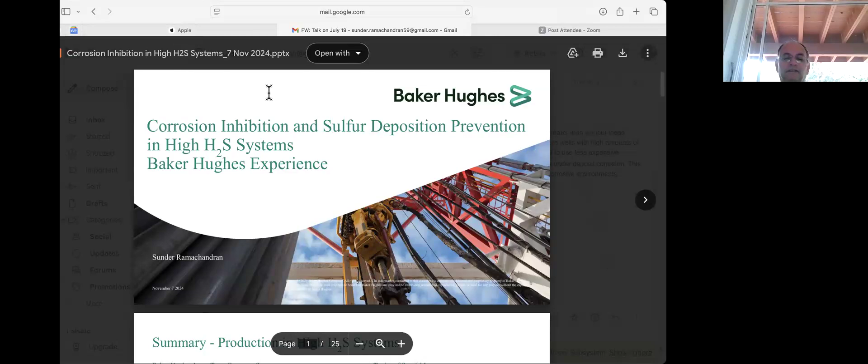Ooh, what happened? Did I do something? You're messing around, Sunder. What have I done? Do you see this? Now we're sharing your emails with us, your email now. Oh hell, what did I do? I was trying to advance the slide. Okay, go back to share. Oh wow, sorry, this is ridiculous. Not a problem, share. Okay, share. Desktop one, okay, let's see if it goes in here. Okay, now it's good, now it's good, now will it? Okay, yeah, I can move now. So I couldn't have moved, I wasn't able to move.

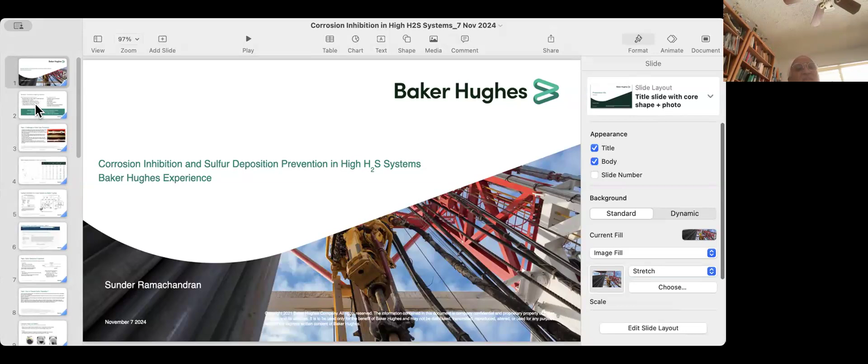So I'm going to talk about corrosion inhibition and sulfur deposition prevention in high H2S systems. This is pretty important because people have been producing in high H2S systems since the early 90s or even the late 80s. My company has had a lot of success working in this area, and we've been involved in some of the earliest and highest temperature wells. In Mississippi, there's a certain formation that got down to about 400 Fahrenheit, and we've been treating there, we were among the initial people working there, though our competitors are perhaps there now, but Shell started producing in these facilities which are extremely high temperature and high in H2S.

These fields are important because there is naturally hydrogen sulfide present in a large number of oil and gas wells. As you go lower down, when you reach 150 Fahrenheit in a limestone formation, you get huge amounts of H2S. For example, in Qatar or in the Ghawar field, there's the Khuff formation. If you drill down lower, once you pass 150 Fahrenheit in limestone, due to thermochemical sulfate reduction, the sulfate gets reduced by organic material to H2S, and you get large amounts of hydrogen sulfide.

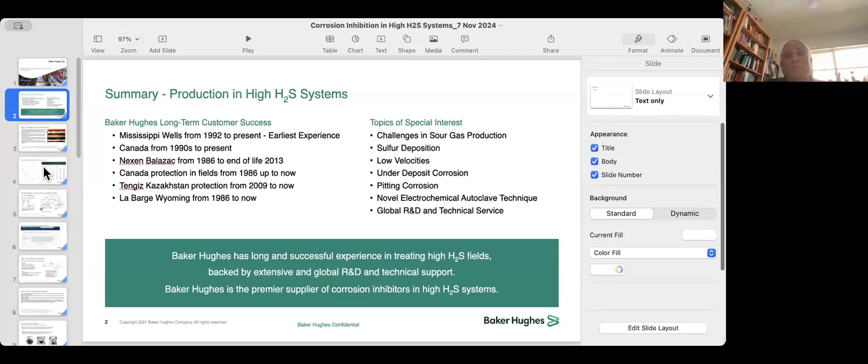We do, for example, Qatar condensate, which can be extremely corrosive. A lot of your major facilities which have high amounts of H2S, we protect them. Production and capital costs can be substantially much higher, and you can have sulfur deposition problems. You need to control that deposition.

Sour gas will increase because we have basically drilled most of the low reservoirs. The deeper you go, the higher the H2S. In fact, if you go to particular fields, you'll see this as you go down.

We have used these to enable people to use less expensive materials. Carbon steel has been in use from the 80s and 90s. Sometimes there's not great awareness of this, and this is the reason it's there.

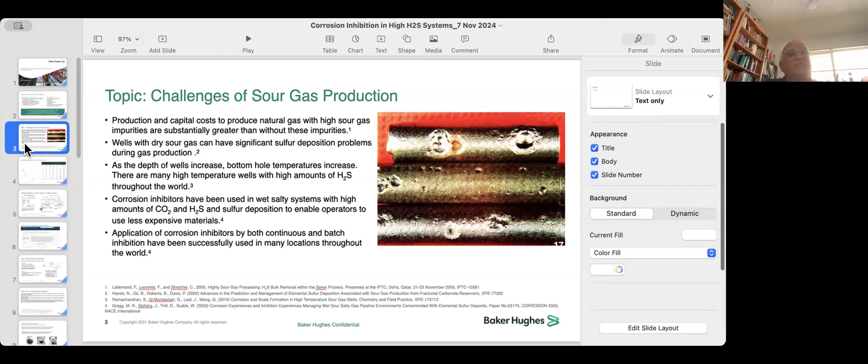These show our experience where we have worked in a 90% H2S field. This is Exxon LaBarge, 65% CO2. We have a range of applications, and you can see different chloride levels, different liquid production.

When you do corrosion and you look at corrosion, oxygen corrosion is most probably the most aggressive. CO2, H2S gives you pitting corrosion, and you do need higher concentrations of the inhibitor to work. This shows the different places where this works.

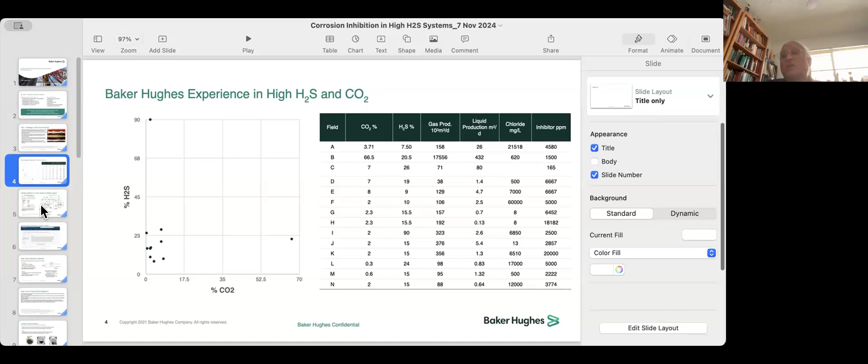High H2S is there in many, many fields. In the Indian context, perhaps Cairn Energy is also seeing some sort of H2S, but not as much as many of these fields.

This is the application in Thomasville, which is in Mississippi. What was done here was basically you put an inhibitor in. It was very important to determine the right phase and have an oil which doesn't flash out at 400 degrees and would carry the inhibitor through.

You can see the wells are 29 to 45%. You can see also in this system, this is the kind of system you need, and these have been very successful.

They're expensive, but putting in an oil carryover system was the way in the 1980s and 1990s that people chose to protect them. This is a Shell facility, and this is Exxon - the Mobile Bay production. Very few problems, but it was very important to have this phase stability and the choice of carrier oils to be done very well. If you don't do that, you have problems.

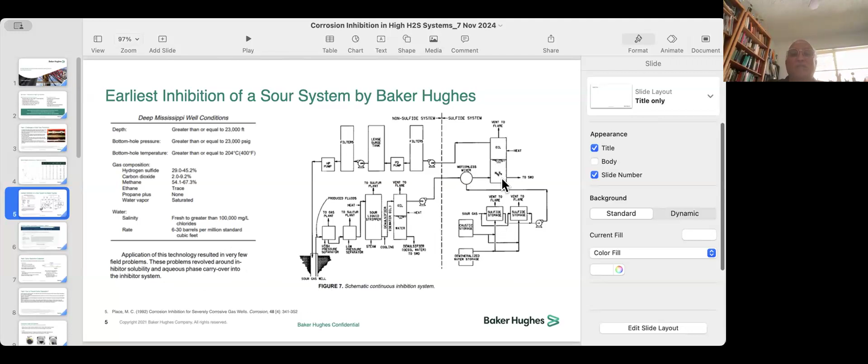This is the example for us at Bearberry in Canada, where we have protected a 90% H2S field. The problem right now - in the old days, there was a time when you really wanted to have sulfur.

The sulfur would be used in fertilizers. Nowadays, although you recover sulfur, fertilizer production prices are not great. Sulfur sells at about $40 a ton or something like that, which is very, very cheap. And so that's a problem - you don't want to really get into this.

One future area could be that there's lots of H2S in the ground. The dissociation energy of H2S is one-third that of water. One could think of a hydrogen economy relying on H2S and decomposing it to sulfur and hydrogen. That's possible, but right now no one is doing it. There's no technology, but that's an area of technological interest.

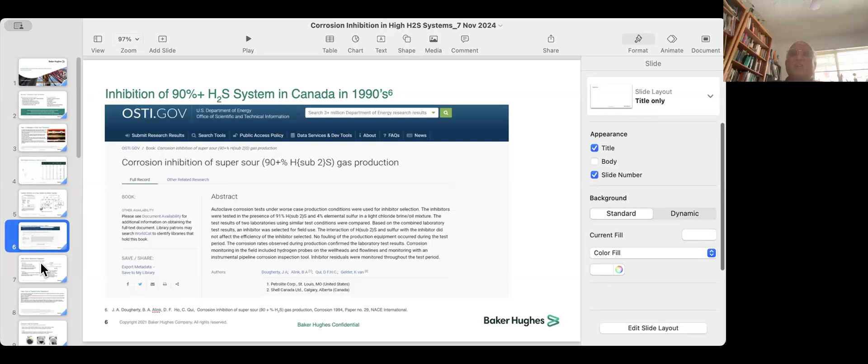Sulfur deposition is a significant cause of corrosion. Basically, the sulfur saturation point gets exceeded. When you bring up a high pressure, high temperature well, sulfur is soluble in the gas and oil, and often the gas behaves as a supercritical fluid, so you get a lot of sulfur there. As soon as the gas pressure lowers, solubility drops and you get deposition, and this is where you can get extremely severe corrosion.

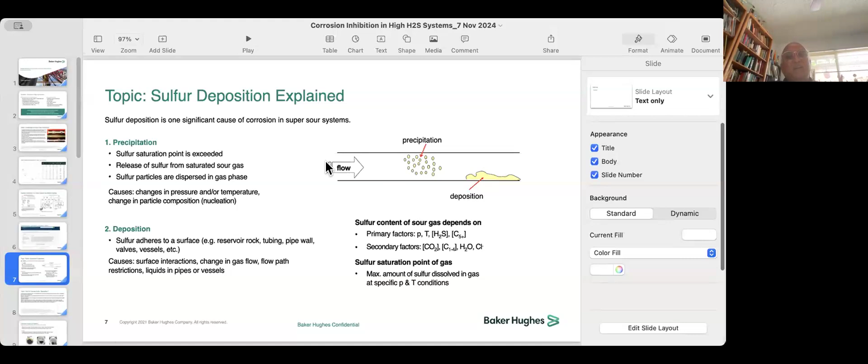This needs to be avoided at all costs, and one needs appropriate sulfur solvents and sulfur dispersants. There are sulfur solvents which have become fairly problematic because they're carcinogenic and have other issues, so people use certain dispersants instead.

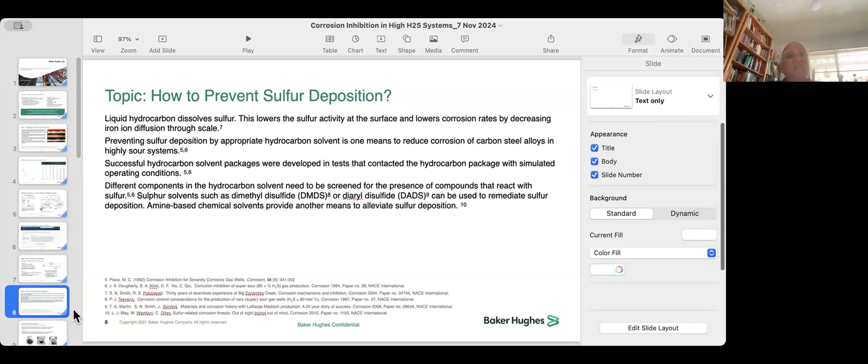So how do you prevent sulfur deposition? Sometimes hydrocarbon itself dissolves sulfur, so if you have lots of hydrocarbon you may not have this problem. You can sometimes inject an appropriate hydrocarbon solvent, and there have been many hydrocarbon solvent packages that do this. Dimethyl disulfide and diaryl disulfide have been used to remediate this, but these are extremely corrosive substances, and we also have amine-based solvents and dispersants which alleviate this sort of deposition.

This is actually the Nexen-Balzac system. It was lines near 1 million houses. These lines had 32% H2S... it was high. We protected that system until it closed. It closed when Nexen was bought by CNOOC, I think partly for the reason of how to deal with the H2S in these systems.

We used a kind of asphaltene sulfur dispersant to address this. A lot of it is correct chemistry, but it's also about the people involved—you need people monitoring the system and continuously looking at it.

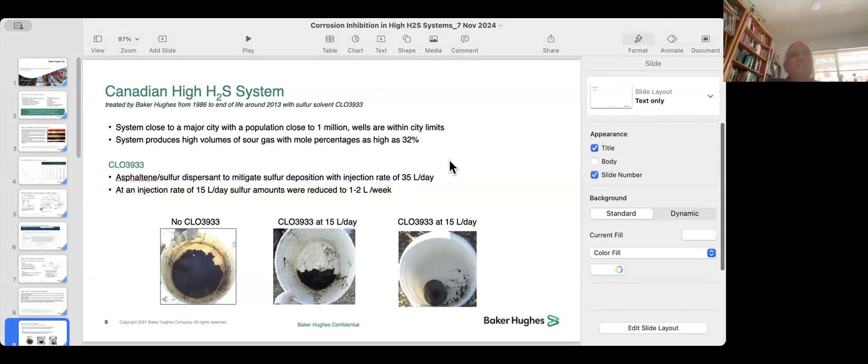Again, we have these sulfur deposition problems in Canada, Tengiz, Abu Dhabi—all of these places. Using the correct solvent at the right point, and looking at the solubility and phase behavior, you can sometimes find a solution. Ideally doing something thermodynamically correct is expensive, so you instead keep something in dispersion, which is the cheaper solution, and that's what industry generally does, as long as it's done consistently and properly.

So we have a whole bunch of solvents. We're big players in the Canadian market, and we use these all the time.

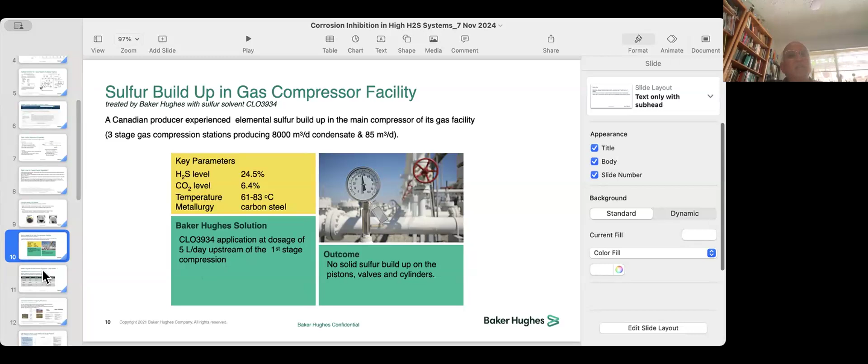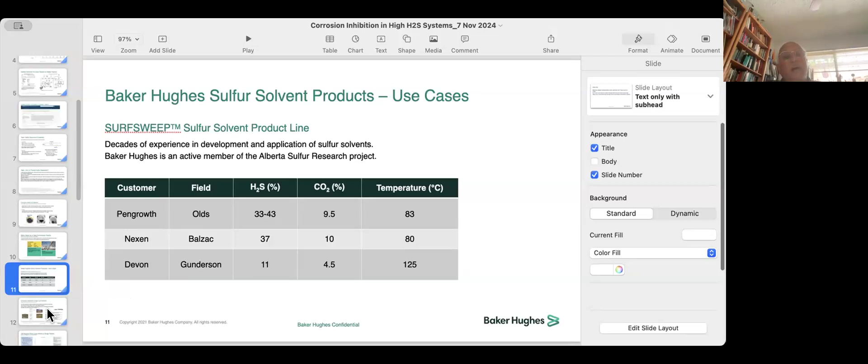These are different fields: Pengrowth, Nexen-Balzac which I showed you. You can see the place from Calgary Airport. The Western Sedimentary Basin of Canada is full of high levels of H2S. If you drive up to Banff, you'll see several areas where people had been producing natural gas that was high in sulfur content.

This is an example where, from 1986 onwards, we have been protecting a 40-mile pipeline. Originally people did not think one could inhibit it, and it was difficult to procure high alloy steel for the pipeline. Because they wanted to start, a lot of experiments had been done on the corrosion inhibitor, so they just put in a carbon steel pipeline so they could produce, with the expectation that this might corrode away.

This system is 66% CO2, 5% H2S. It was the second largest helium production facility in the United States. It has been producing since then and is still producing now without any problems. Commercial production in that area is 720 million standard cubic feet of gas. We're very proud of this.

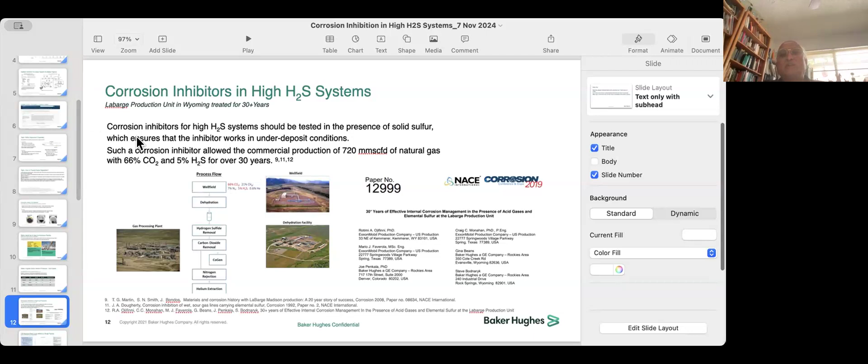This is a joint Exxon and Baker Hughes publication, showing the same thing. At one point they decided to reduce concentrations, and that's why they had problems. These are values from the early 1990s through to around 2015 or 2016, and basically we've been protecting it the whole time.

An Exxon engineer once told us you can inhibit this—you could basically produce any system with carbon steel, if you just get the inhibitor availability right. But it's not always that easy. This is an enormous 65% CO2 system that works very well. In this facility, the CO2 is actually separated and injected into the ground, or recovered and used for enhanced oil recovery all over the Wyoming area.

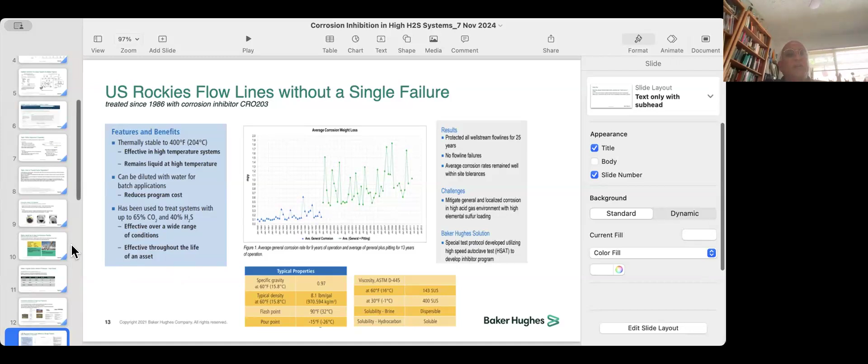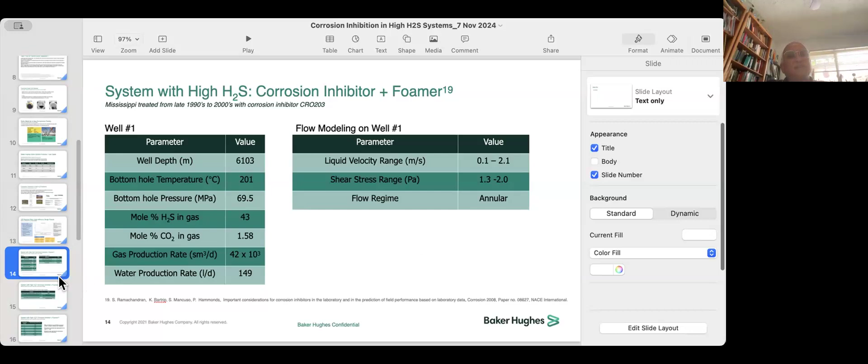And again, we've all learned material. For me, being in the additive business, material balances have been a go-to whenever there's a big problem. Whenever your additive is accused of causing precipitation or something else, the first thing you do is a mass balance, and it's so important. So all of this, basically my basic chemical engineering training, which was excellent, was very helpful for me in all kinds of things. It was really basic thermodynamics, basic chemical engineering to understand it, and here it was very important to figure out what that water film will be.

And the importance of all of this is that definitely in the United States, we are producing a lot of oil and gas in very dangerous conditions, but it has been handled by the industry well. It's handled very well when professional people are involved. And even when it goes to smaller companies, as long as that care is exerted in the facility, you don't have problems.

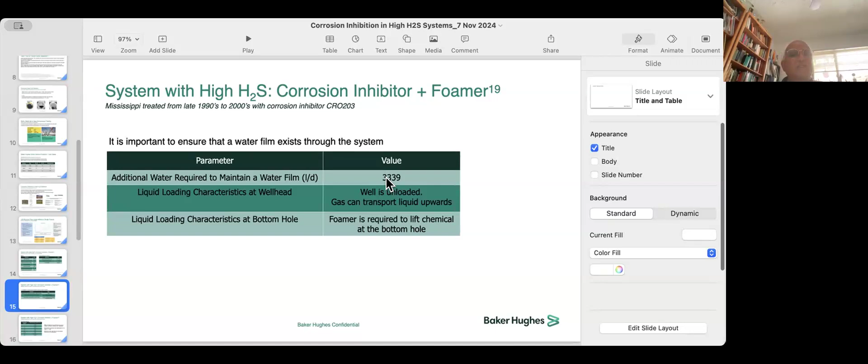In contrast, in the United States, here it's basically you're worried about lawyers. In Canada, the regulatory agencies are really, really good and really helpful also.

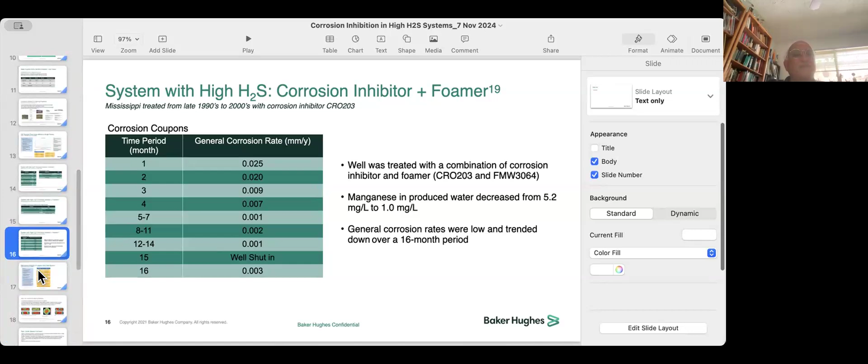So again, this is a case - for me, when I was young, in my first undergraduate with A.K. Singh, I complained about analytical chemistry. We use analytical chemistry all the time for this - basically these are samples where you take the sample and do inductive coupling plasma atomic absorption spectroscopy, and find out the manganese and whatnot, and then look at the ratio to find out how much these work. We use it all the time. So I regret a lot of the fuss I made back then, which I shouldn't have.

So again, this inhibitor, the 3366, was extensively used in Canada, and it's used in Tengiz, or had been used - in Kazakhstan fields also. We did a lot of work on this. To reproduce pitting corrosion is very difficult, and in fact, in the project that created this, we had to spend a year trying to reproduce the pitting corrosion, to figure out a method for producing it. Then once we find a method, you just go and test a whole bunch of things.

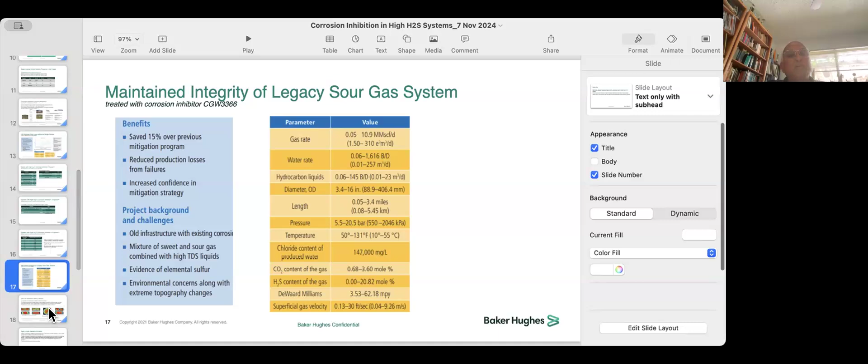And we found what would be a very, very popular inhibitor all over. So again, low velocities are the leading cause. Your pipeline should be traveling at sufficient velocity that small particles are not depositing out. But many times what happens with time, this is tough on the oil field, because with time you're not able to maintain that velocity because you don't have that production.

And you can create, especially in H2S systems, heavy deposits. The reason you get the corrosion is the iron sulfides are semiconductive, so they create galvanic effects. And it was hard to reproduce, to get test methods for recreating corrosion. One of the ways we did it is in anoxic environments, and you have to be very careful - you want your facility to be completely oxygen free, at very low amounts of oxygen.

You then create mackinawite, or create this condition. When you introduce it, here these are interferometer images. So you can see this is a case where it's nice and smooth. But you see all of these show tremendous pitting. This pitting occurred when we introduced precipitated mackinawite.

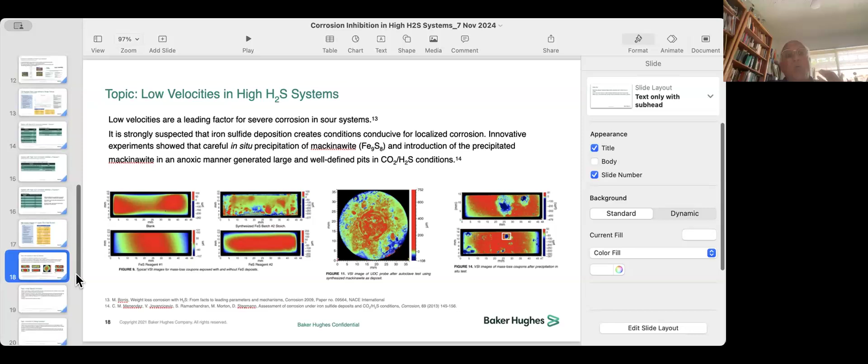So again, under-deposit corrosion is there. There are different ways, and it's really important in actual operation to clean your system. There are galvanic means of looking at these. Sometimes in these studies, when you apply a corrosion inhibitor, the corrosion can be increased. I'm not sure whether these are always... no, these are not artifacts. You have to be very careful.

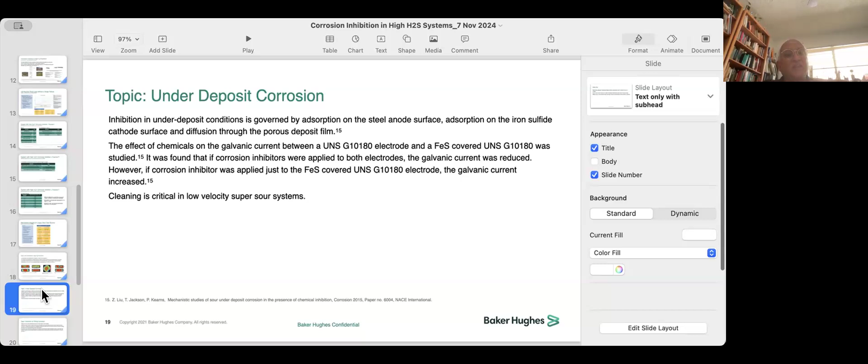So again, a lot of the point of really maintaining a system in high H2S is to prevent the deposition. It's predominant, pitting corrosion is what causes failures, and you need to have proper methods to select those.

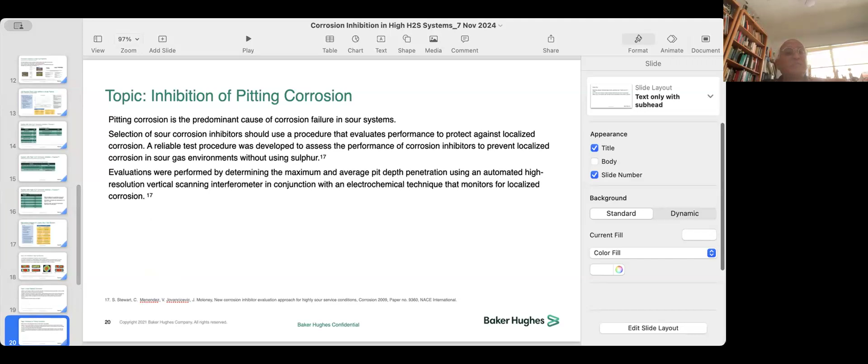And we developed things which, without using any sulfur, it took a long time. This took about a year just to figure that out, by Sean and company. So really we looked at different ways of penetration, and we used that to develop products, and actually the 3366.

One way of doing it is simply you put your coupons in, take them out, wait for it—could be 7-day tests. We also developed an electrochemical technique. Whenever pitting occurs, normally your system is at a galvanic kind of equilibrium, so in our CO2 systems, they're just above the iron to iron-2-plus point on the galvanic series. If you see a big bump in potential, that can be, or that's what we think is, the initiation of a pitting event.

So we have software that when we see a big bump in our corrosion potential, we do LPR and see what the corrosion rate would be. Then you can count these, and we've had a patent and other things on this. We can count where they are. There was very nice work done by colleagues of mine, in which we can associate each one of these pits with the actual images.

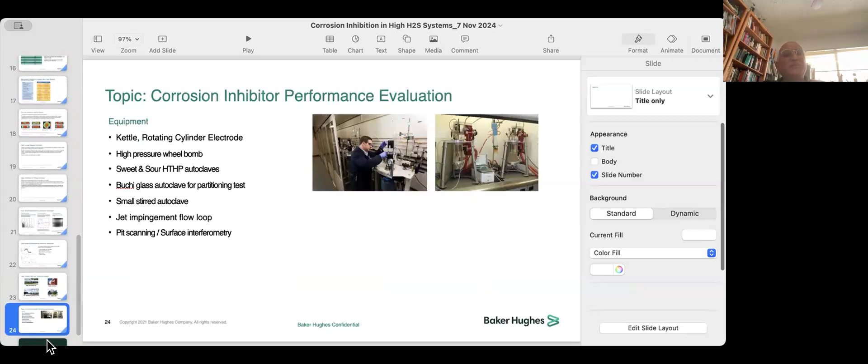And I think with that—I'm here more, it's more—okay, I don't know what topic I have, this is mistaken. So thank you very much. I hope it's not too boring.

Not at all, Sunder, thank you. I think people can just speak up if they have questions. Yeah, and I want to commend you on a very punchy and brief overview of these issues. Okay, thank you, yeah, thank you. Yeah, I like the short presentation too, punchy and short and sweet. Talking about sweet gas or sour gas or whatever.

But anyway, so what is the typical lifetime of this plain carbon steel material in these aggressive environments? So at Shute Creek, in Wyoming, from 1986 to now. Again, with a wonderful operating team, ExxonMobil and us. ExxonMobil keeps us on our toes, right? So we do the right things.

Okay, how bad can it be? With sulfur corrosion, in 2 months, 3 months, you can have a disaster. Okay, that's great—so that's the difference between good performance and bad performance, and that's one of the reasons why a producer like ExxonMobil—you look at its website and you'll see that it prides itself on how it produces. Qatar, the RasGas, the first things were all with ExxonMobil actually in the production there.

Then I have to leave. Now I have to figure this out. Thank you, bye, see you.